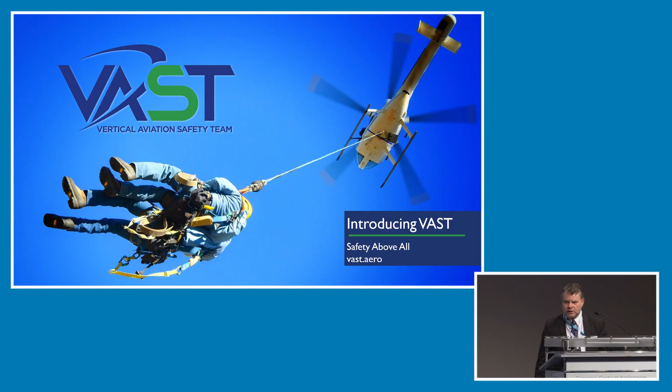If you want to know, and I kindly invite you to try and get more information about the VAST, please refer to the vast.aero website.

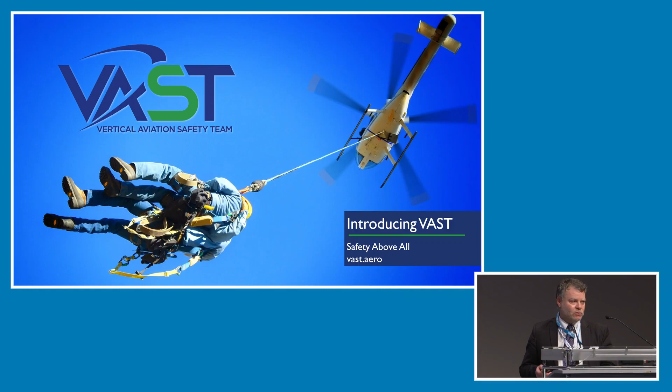And now this is the entertainment part of the workshop. We would like to share with you some of our recent videos. And as you will see, they will touch various topics. The first one is a video developed by Leonardo Training Academy in Sesto Calende, Italy, addressing the number one risk, number one killer, i.e. loss of control in flight.

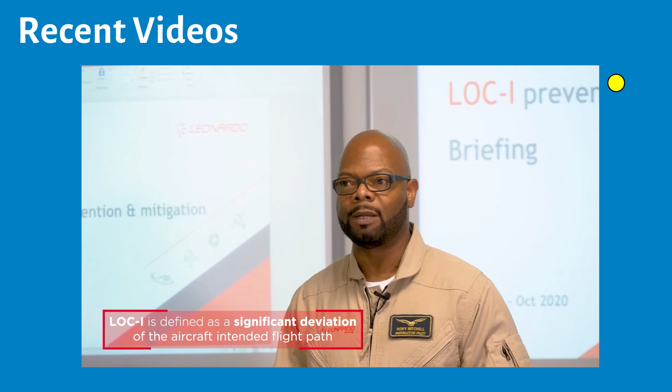I would like to talk to you about the loss of control in flight, commonly known as LOCI. One of the most dangerous scenarios to a helicopter pilot is the loss of control in flight. LOCI is categorized as an accident or incident in which the pilot was unable to maintain control of the aircraft in flight. It's defined as a significant deviation of the aircraft's intended flight path, usually preceded by an upset. An upset is generally recognized as an in-flight condition when an aircraft unintentionally exceeds parameters normally experienced during normal line operations or training.

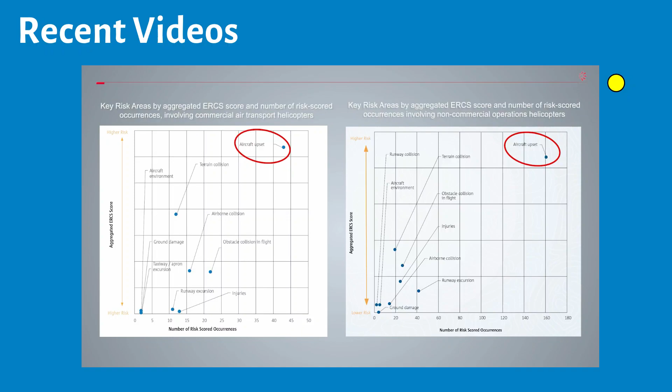Unfortunately, LOCI is the most relevant cause of fatalities in aviation. Let's reference the EASA Annual Safety Report published in 2020. These graphics point out the key risk areas for aircraft upset based on data reports. As you can see, aircraft upset is the highest risk area, particularly for general aviation. It is important that our helicopter pilot community is fully aware of this potential risk, and I'm here to raise awareness and try to keep you safe in the future.

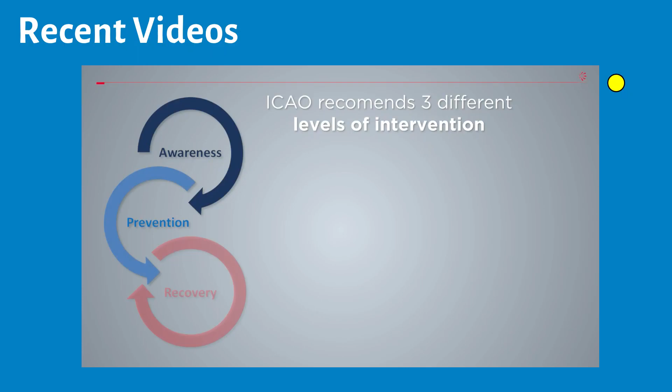No single solution can mitigate LOCI accidents. We believe that through an integrated approach, it is possible to better control this risk area through various interventions that embrace the full spectrum of human and machine interaction. ICAO recommends three levels of intervention: awareness, prevention, and recovery. Awareness addresses the knowledge, threat error management, and crew resource management skills of the pilot. Prevention deals with recognizing an aircraft upset evolving early. Recovery is where the aircraft has entered an undesired state and the pilot must intervene to recover.

The goal of threat error management is to identify and recognize threats, reduce errors, and prevent undesired aircraft states that could potentially lead to LOCI accidents. A threat is an event or situation that occurs outside the pilot's ability to influence. An error is a pilot action or inaction that leads to a deviation from intentions or expectations, reducing safety margins. In the language of TEM, we talk about trapping errors - a trapped error is the first step in breaking the chain of events that may lead to trouble.

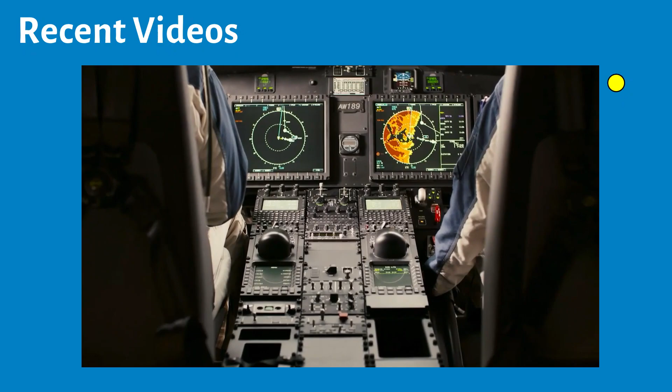Through training and practicing TEM, we can adopt strategies and countermeasures to effectively mitigate aircraft upset risk. CRM is about managing resources. TEM is about managing threats and errors. In highly automated helicopters like the AW189, the optimal use of automation is an additional resource to reduce pilot workload. This also includes the flight director modes coupled with autopilot.

Let's simulate a possible scenario. The pilot is flying traffic patterns during nighttime operations with autopilot flight director modes engaged. Unexpectedly, the TCAS system alerts the pilot about the presence of traffic. This focuses the pilot's attention to visually acquire the intruding aircraft's position. The pilot reacts, reverting to manual flight by disengaging the flight director modes and maneuvering by pressing the force trim release button to avoid possible in-flight collision. This could induce spatial disorientation that might lead to an undesired aircraft state due to poor monitoring of the flight parameters.

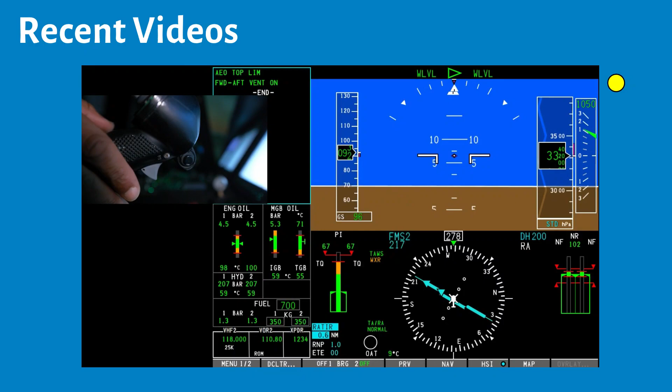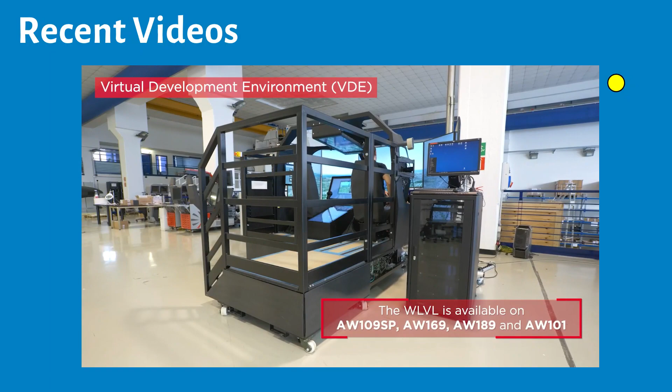The AW189 is equipped with a function that could help the pilot in reducing this effect. This function is known as wing level. It's a flight control system mode which automatically acquires and holds safe nose-up pitch and wing level roll attitude. The wing level mode is available on the AW189 and other Leonardo helicopters.

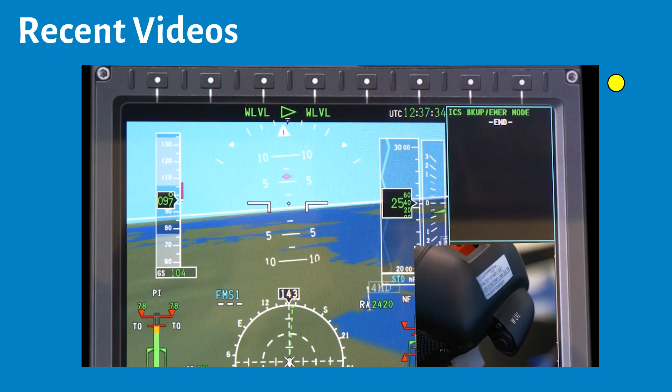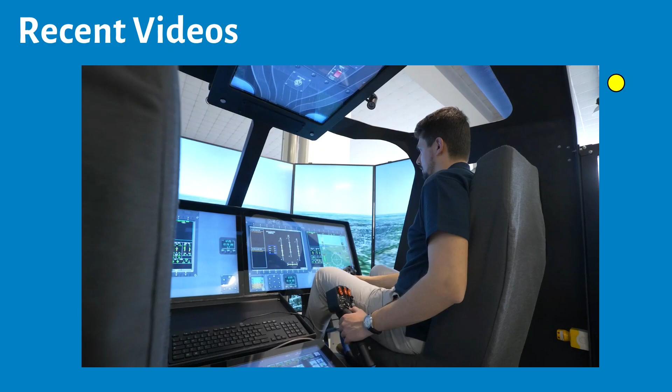Let's see how it works. A single dedicated push button on the cyclic grip is used to engage the wing level mode. Status indication is displayed on the primary flight display, along with pitch and roll reference bars. Once engaged, the helicopter smoothly stabilizes to a safe attitude. The wing level mode is disengaged by requesting ATT mode activation. Mode transition and disengagement annunciations are provided to the crew. There are no mode engagement limitations in terms of airspeed and altitude flight envelope. The wing level mode provides the pilot with a very low workload solution to improve situational awareness and help prevent spatial disorientation, which could possibly lead to unintended aircraft state situations.

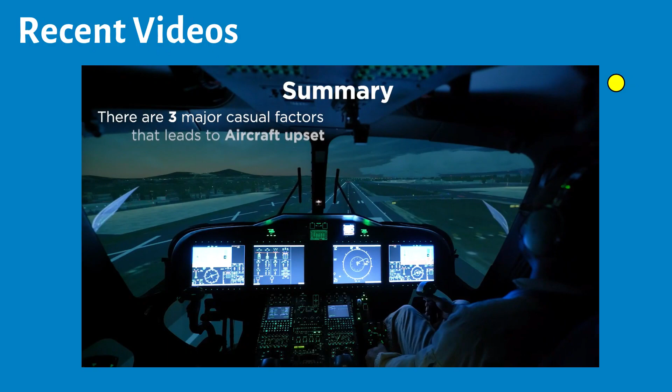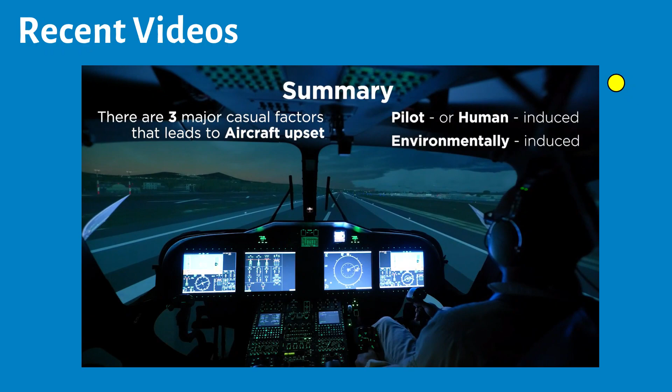There are three major causal factors that lead to aircraft upset: one, pilot or human induced; two, environmentally induced; and three, systems induced. Keep in mind that automation itself is a wonderful thing, as long as we are in charge of it.

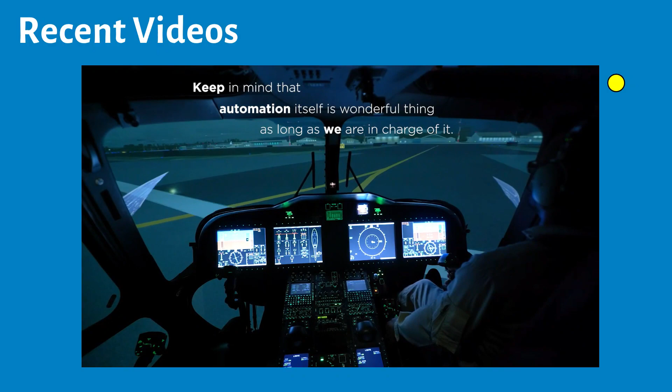I'd like to conclude by thanking you for your attention today. I ask that you remain focused on learning and share with others what you've learned, because a successful prevention is always better than any recovery.

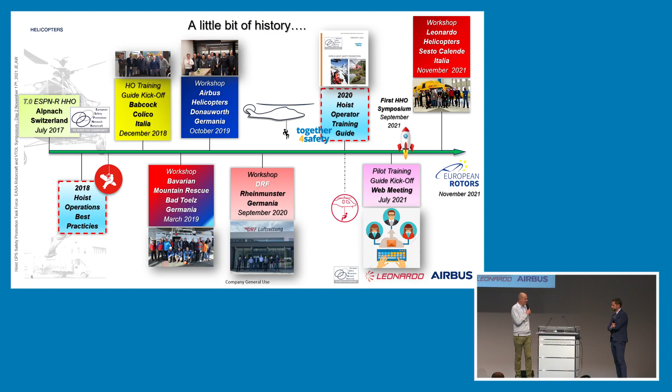The community is growing. We have more and more people participating in this working group, requesting more information on hoist operation, on safety, on equipment. So we have a lot of positive outcomes with what we are doing, and we are quite proud of the progress.

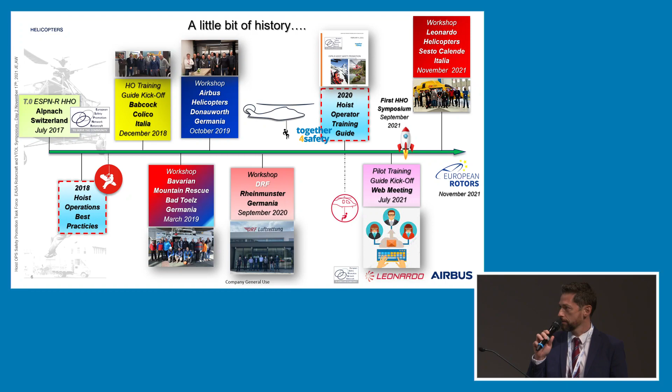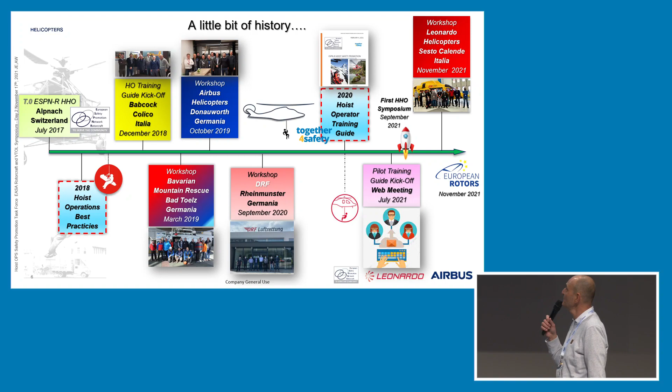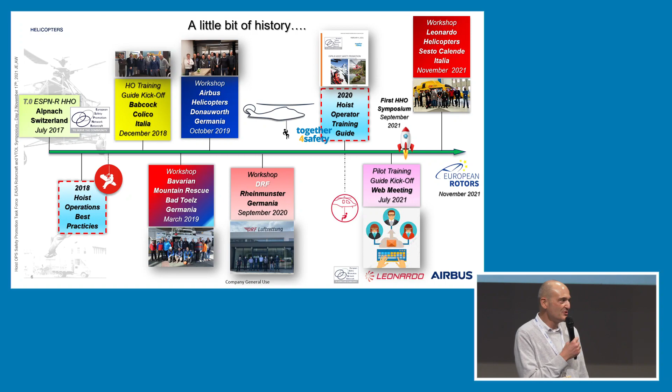We'll have a picture of the LinkedIn forum at the end of our presentation. As you can see here, we've had a couple of workshops until today, and the most recent one was in Sesto Calende just a couple of weeks ago, where we met with, I think, already 10 pilots working on the pilot guide. We're making progress, but as Michel and Bernd said, this is not our main job - we're doing that on top of our normal duties. I consider this, in the meantime, already a hobby - looking for stuff on the internet and YouTube to be shared on our LinkedIn channel.

Here you see a brief overview of all the participants contributing to our project. I'd like to add something: Airbus and Leonardo are working closely on this topic, and it's very particular and very new, especially for Leonardo. So it's a good example of cooperation when we talk about safety.

Part of the content is a nice statement from Igor Sikorsky: a direct lift of an aircraft could come and save the life of a stranded person or a person in distress. So we've basically done helicopter hoist rescues since the 40s. It was mainly rescue missions from the early days, mainly military, and the rescue scenario for the hoist had then diverged to a more modern style helicopter nowadays. I think this is a 139, isn't it? Or 169? Okay, I'm not so familiar with your product.

Sorry for that. And from, I would say, the somewhat 2000s, the hoist has also become a personal transport device for harbor pilot transport, because it was obvious that a maritime pilot could be transported in a safer way with a hoist rather than with a vessel. There are horrifying videos on YouTube where harbor pilots are smashed between vessels when they board, or try to board, the ladder because of high sea states. This is really something which the helicopter rules out completely.

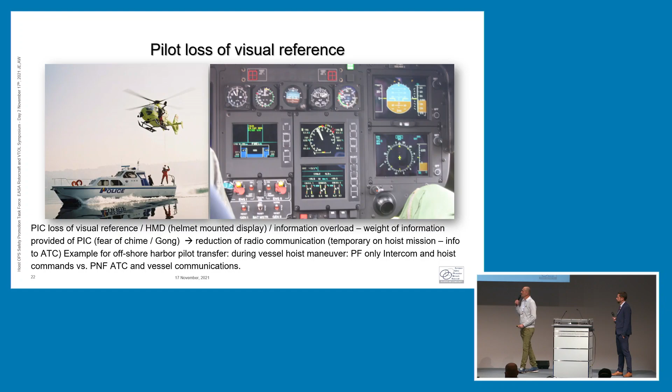Loss of visual reference - as you can see here, this is an EC-135 with a hoist equipped on the left-hand side, but the pilot is sitting on the right-hand side. So it's a very delicate situation. Even though this was an exercise in Switzerland, the pilot has to maintain visual reference to a moving target, which in this case is a ship.

When we perform hoist operations, the pilot most of the time - 99% of the time - loses visual of the target on the ground. So if he doesn't have any references to perform his hovering, there's a high chance for him to lose the vertical of the position. And during the lift, maintaining the vertical is a key point for us to be accurate and safe.

During our work, we also figured out that offshore passenger equipment is probably not really standardized. If you pick up a pilot from a vessel, they have an auto-deployment life jacket, whereas the life jacket in a helicopter has to be a manual one. So there is a contradiction between equipment requirements existing in the industry, maritime versus airborne equipment. This is also a field which we need to discuss and develop further, so that we may avoid potential incidents or accidents in flight.

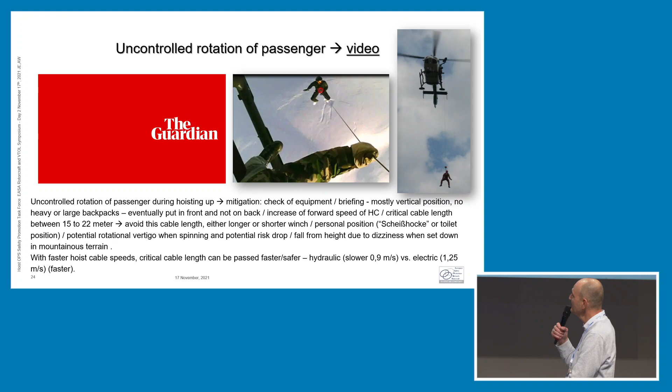This is probably famously known. I hope it will work. No, it does not work, and it does not even start. There's a video, but I don't know if this is starting. No, it does not. So let's talk about it. It works. Oh, now it started.

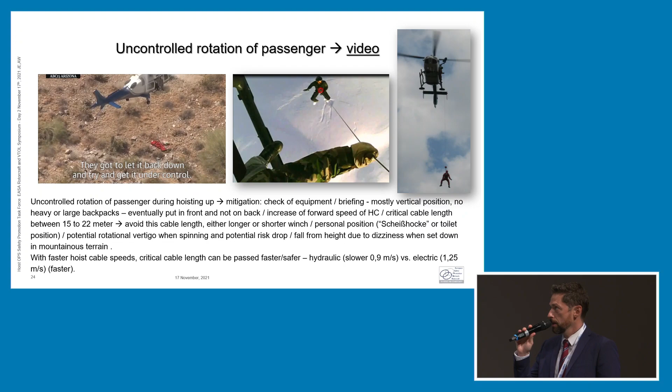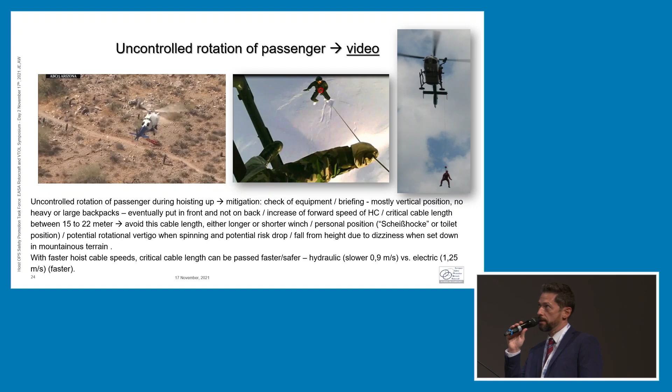When lifting a stretcher, it's a bag, so it's very sensitive to the downwash. Arriving into the downwash, if you don't have an anti-rotation system, the stretcher starts to spin, like in that case. The hoist operator had a chance to lay the stretcher down on the ground at the beginning, but now it's too late. The rate of turn is too high, and he has to take a decision. They took a long time to decide, maybe because they don't have a good standard or procedure for that, but they should fly forward, to put the downwash behind the helicopter and stabilize the stretcher.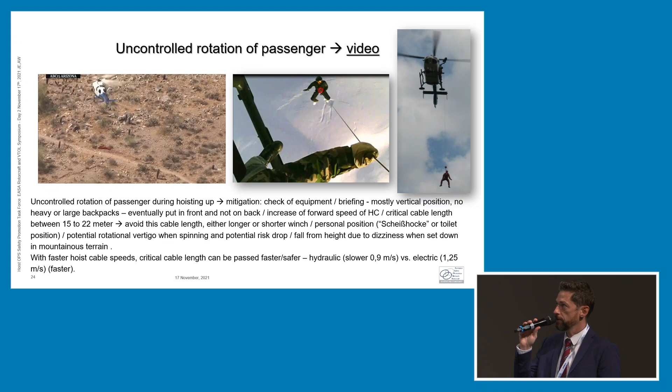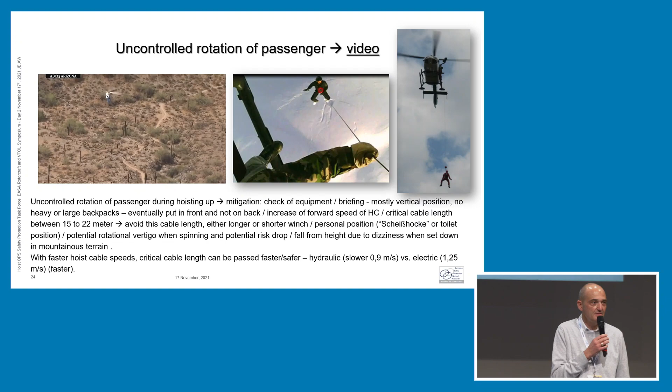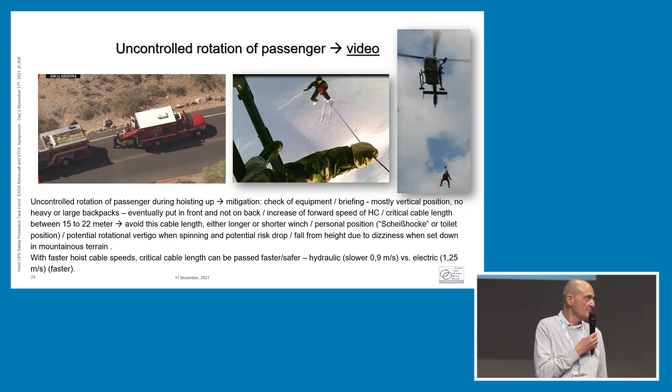Now they decide to take off. It's a little bit too late, but at the end it works. It could have been prevented much earlier if they had continued into forward motion flight to use the aerodynamic drag to dampen the rotation or oscillation. It really doesn't matter whether it's an oscillation or rotation, but at the end, fortunately, the person in the rescue bag was not seriously injured, but she had rotation trauma.

You can also play with your body position if you're just by yourself. We have a nice saying: this toilet position helps against the rotation very well.

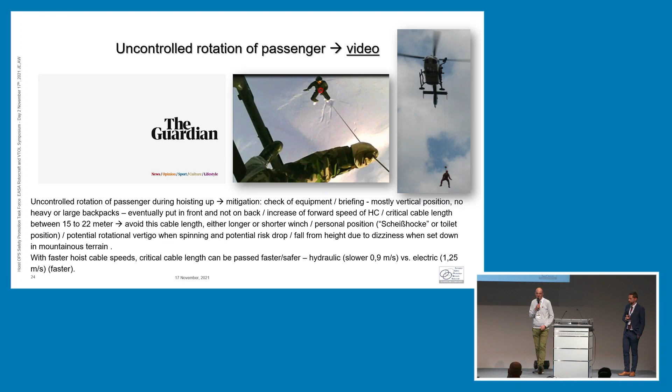Hand signs, hand signals, essential. It has to be in the muscle memory of the person who is on the hook. I don't know if you had the chance today or yesterday to attend one of the hoist demos on the ground, on which we were able to perform. There you can see that it is essential to have clear communication from the ground to the flight crew. Now most aircraft are also provided with wireless communication, giving the rescuer the possibility to always be connected to the intercom of the aircraft. Obviously it's a real advantage, but we are still continuing to use hand signals, because they will always work, even in a complete loss of communication.

PCDS is a really wide area, and there are endless discussions on it. EASA issued the certification memorandum 005 to give good guidance, and this is a document which we, the industry, highly appreciate because it gives the requirement for mountain equipment to be used in that case, especially for the simple PCDS, which is not like a complex basket. As an operator, you can choose whatever you think is appropriate for your operation. The only point is it needs to be EN certified. For a full body harness, it will be a 361 EN certification. For the lanyard, 358. But it gives more choice to the operator.

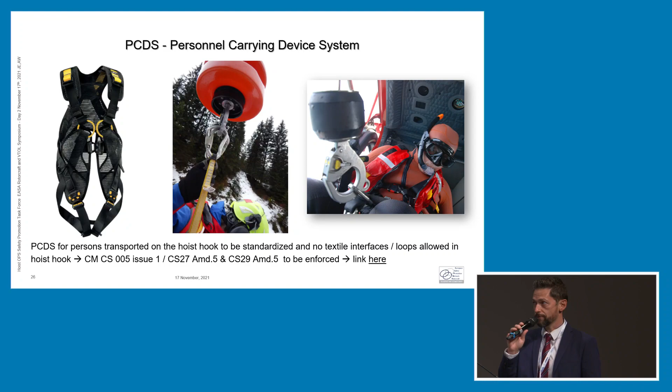Persons on the ground: a helicopter is a nice thing, you see it fly by, but if it comes close to you, a lot of spectators' brains just switch off. They approach the aircraft and want to be closer to the scene, and this has become dangerous. The next picture is even more catchy: stuff will be flying around if it's not fixed to the ground, backpacks will start to roll away, and clothing can come loose and fly, probably into the rotor. There are some really horrifying videos on YouTube and Vimeo about this. So be prepared, if you approach a scene, that something will fly around or people may approach the aircraft.

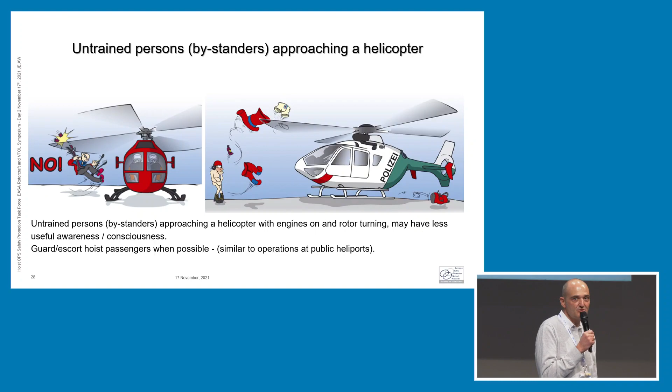We saw a very nice video provided by Airbus on the need to wear a flight helmet. For sure, in hoist operations, there is no discussion - all the crew must wear a flight helmet with a visor. But it's true also for the rescue team on the ground. They need to wear a helmet all the time because they will have to maneuver close to the helicopter with the rotor running most of the time. So this is also very important.

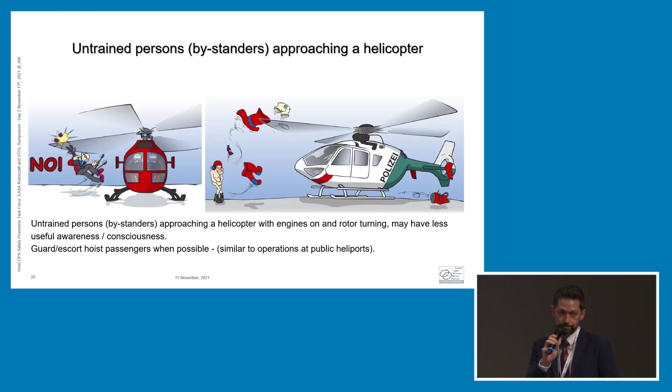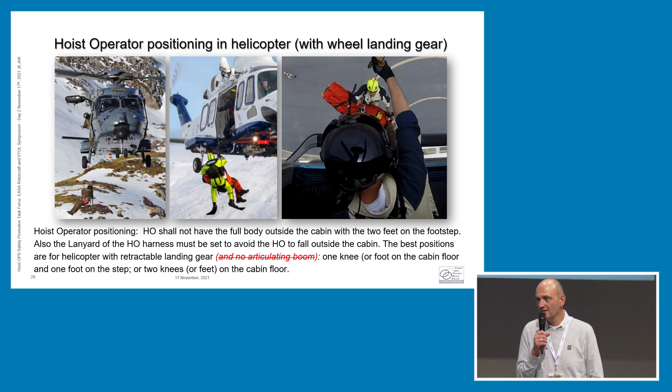The position of the hoist operator - recently there is a lot of discussion all of a sudden on this topic, because there was an issue in Italy where the interpretation of the hoist operator position was questioned. We even had the chance to discuss with the authority today and exchange on the positioning, whether it is a good and safe thing to do. We really appreciate that we have this exchange here in Cologne during European Rotors - it's an excellent opportunity to exchange with the authority, together with operators and the OEMs.

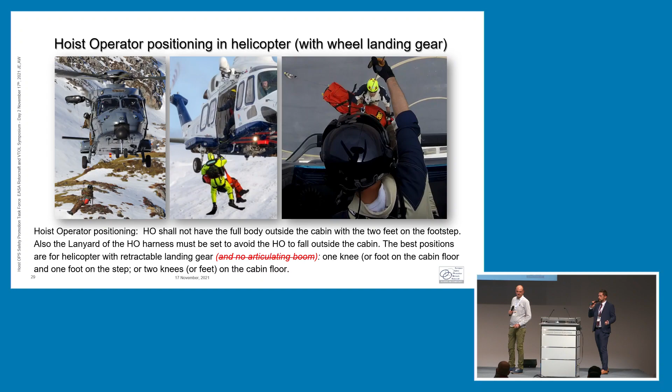When it comes to hoist operation, we have to consider the design of the helicopter, the procedure, and also the training of the people. But if we start with a very bad design, the hoist operator may be too much exposed, and this is something we cannot fulfill with training or procedure. So we are working a lot on this, all the OEMs, to be sure that we provide a good aircraft to our operators.

As you can see here, the hoist operator for a skidded helicopter needs to climb out to reach the hoist cable, because it's basically the control of the hoist. You have two possibilities: the cable length and the cable position, which you need to manipulate by hand, and even counteract in the case of oscillation of the cable or the load.

Even maneuvers at night, I would consider that a risky operation. Nevertheless, it has to be done, especially for harbor piloting. They come whenever, 24/7, and there are some really highly skilled operations in Germany and France that I'm aware of. Not too many people are capable of doing that - it's a highly skilled operation, mainly done with dual pilot operations.

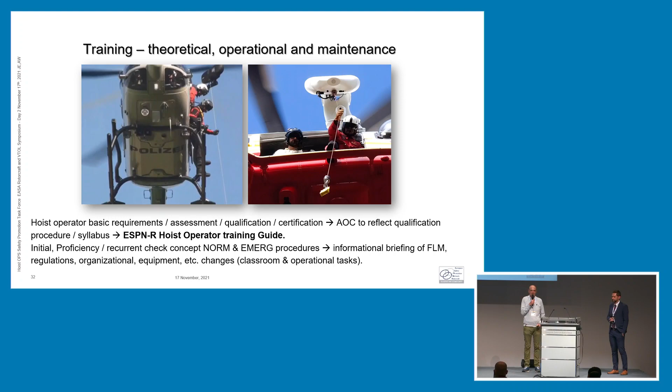Training - this is what I would say is our favorite part of the story, because we got a request from one operator asking for guidance. There is a little bit of stuff in the EASA AirOps 965, but they asked if we could help them get a better understanding of what hoist operators should be capable of. Because more and more people, I would not say off the street, are coming into aviation - even paramedics or just technicians for the offshore wind farm industry want to become a hoist operator. So we sat together and composed this hoist operator training guide.

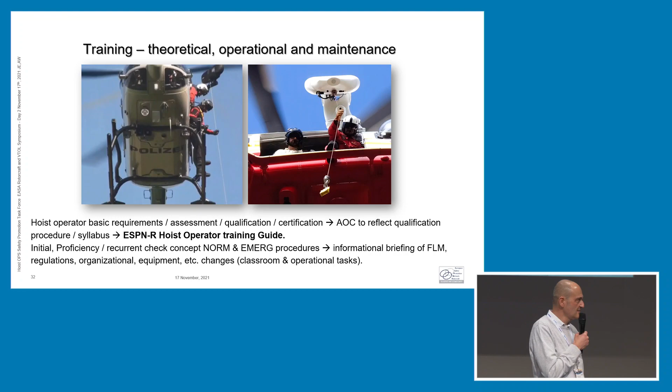We will talk about that a little bit later.

Another lesson learned is cable damage during hoist operations - how to interpret those, and I don't know if Richard is still there. The OEMs give good guidance on how to interpret cable damages which may occur during operation, and what is tolerable, what can be accepted, and what not.

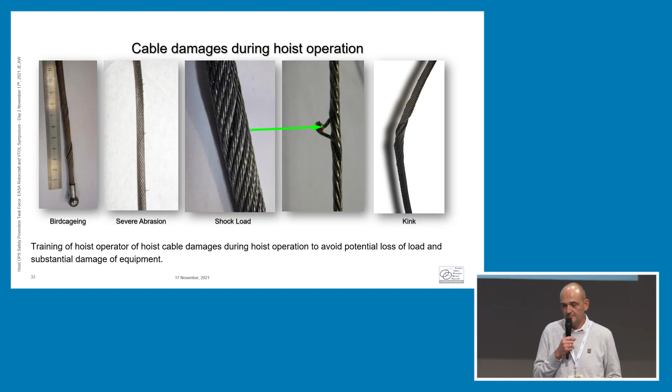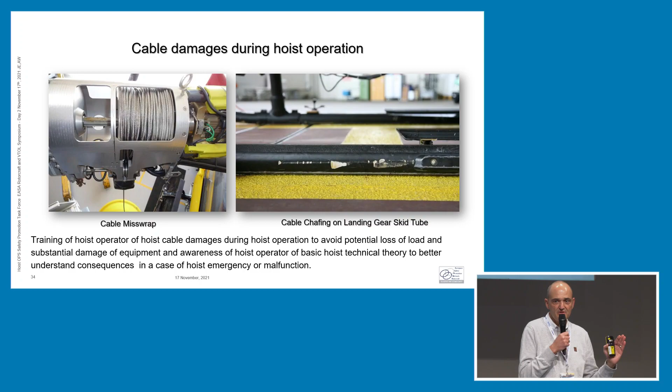But of course, there have been some problems in the past, and some of the hoist installations, like the Leonardo 169 which we have outside, have a cable foul detector. This doesn't prevent this kind of thing from happening, but it indicates to the pilot and the hoist operator that something's wrong - stop the operation immediately.

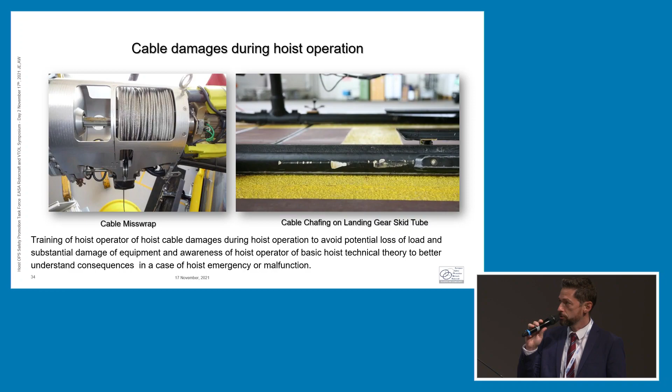It's also here where good training and good standards are important for the hoist operator, on how to manage a malfunction on the hoist, because it could be very hard and maybe lead to an accident if the hoist operator is not able to manage such a situation.